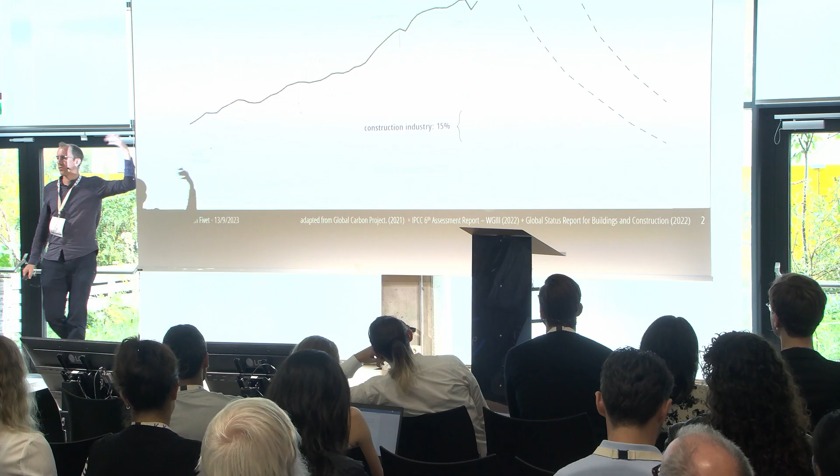So what we see here on this line is the historical evolution of CO2 emissions. At some point, scientists discovered that CO2 is not the only greenhouse gas in the atmosphere and started to measure the other greenhouse gas emissions, and that's the start of the other curve that we see here. This graph combines data from various reports, and the most important one is generated by the IPCC

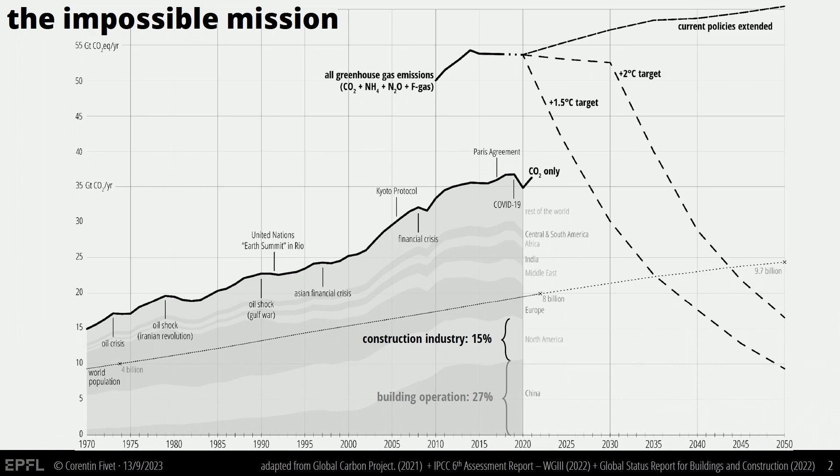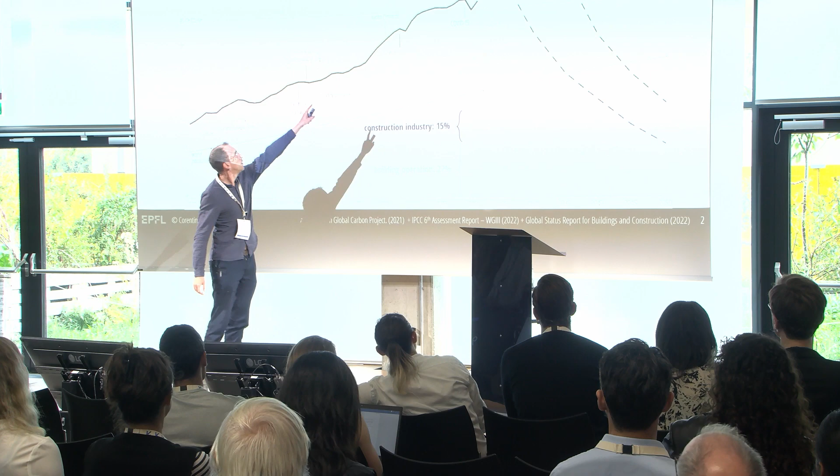1 year ago. What they are showing here is the amount of reduction that is needed to maintain global warming at 1.5 degrees. Those scientists understood that we are not able to reach this goal, so they also show us another curve, which is the maximum 2-degree target.

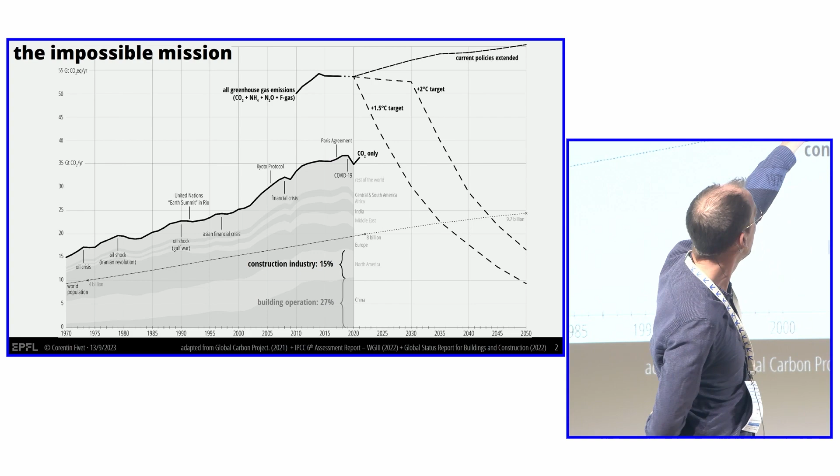Maybe because these scientists know humans too well, or they have a good sense of humor, they also show us the top curve that we see there, which is what will happen if we keep doing business as usual, if we keep doing research as usual as well.

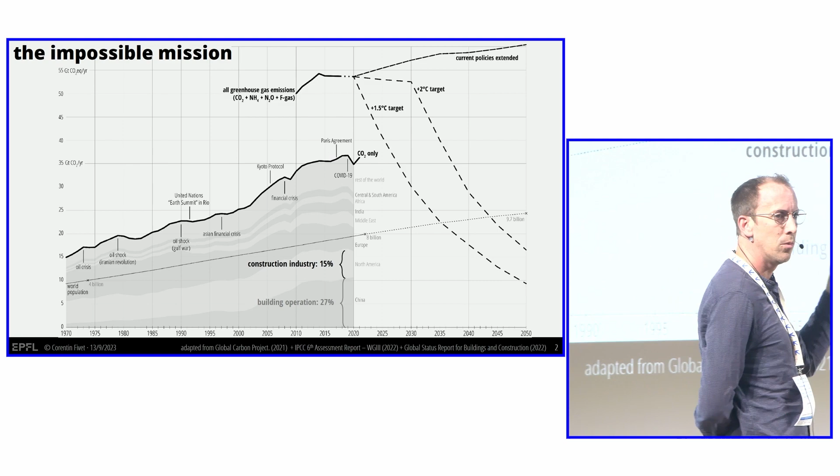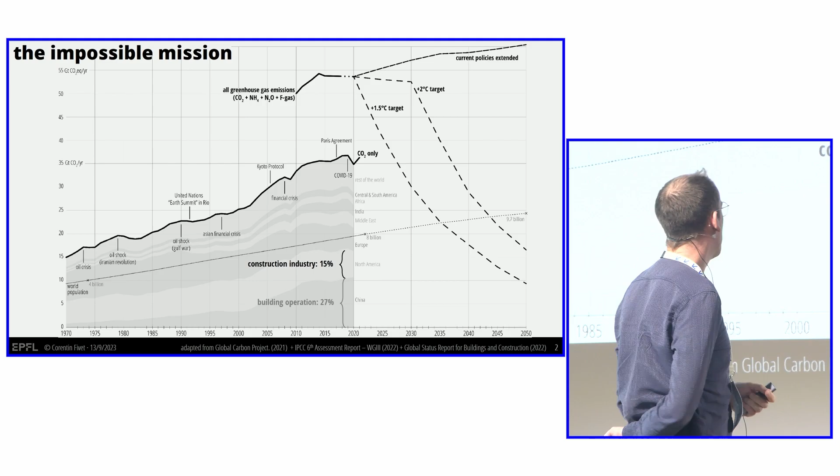This is not a +2, +3, +4 degree target. It's impossible to predict. We only know that all climate tipping points will be reached, and we also know that it's not an environmental crisis anymore. It will be an environmental collapse with all the economic crisis, social crisis, and human crisis that would follow.

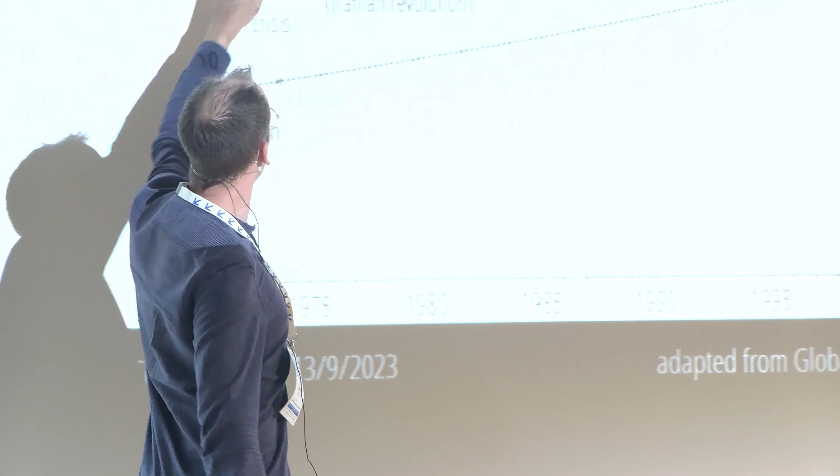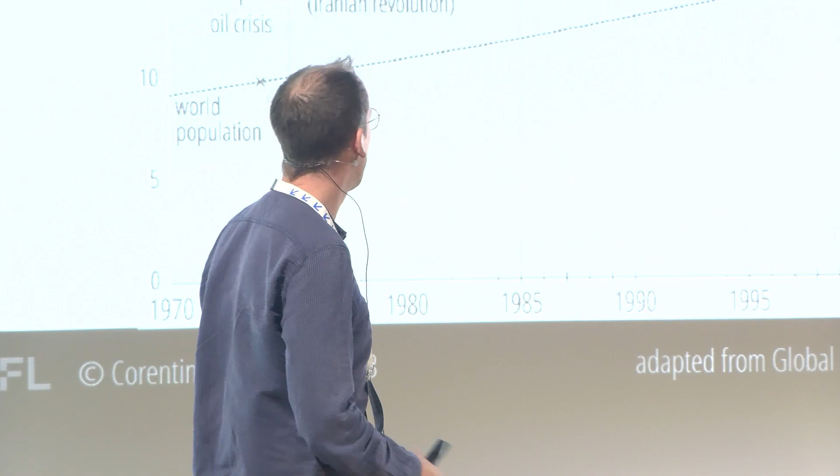On this graph as well, we can see that the only time in history humans have been able to reduce greenhouse gas emissions is during crisis. So we have, for instance, the oil crisis at the beginning of the 70s. We have the financial crisis of 2008, if you remember it, and I'm pretty sure you remember the COVID crisis as well.

So what it means is that if we want to achieve these reductions, we will have to go through a crisis. We are not used to seeing the two parts of these graphs together, but it gives a sense of rate.

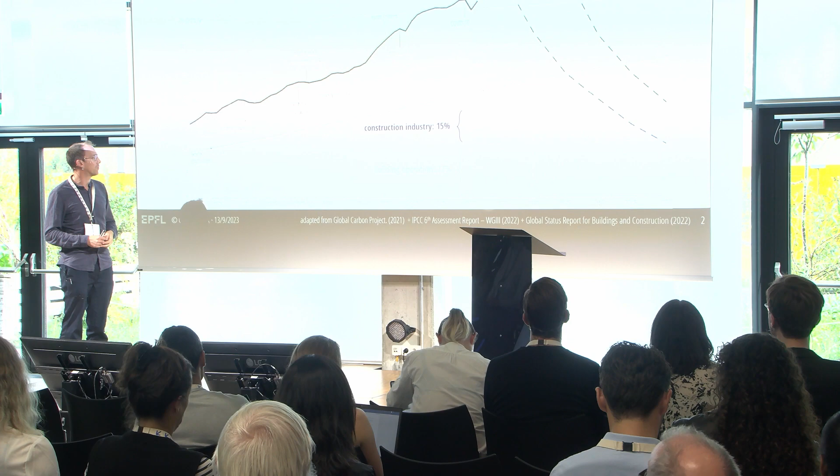And of course, as was presented earlier, the construction industry has a big role here. So what I want to say is that there are two paths. Either we keep doing things as usual, but then it's the environment, nature, that will guide the crisis, and we will have to follow and adapt.

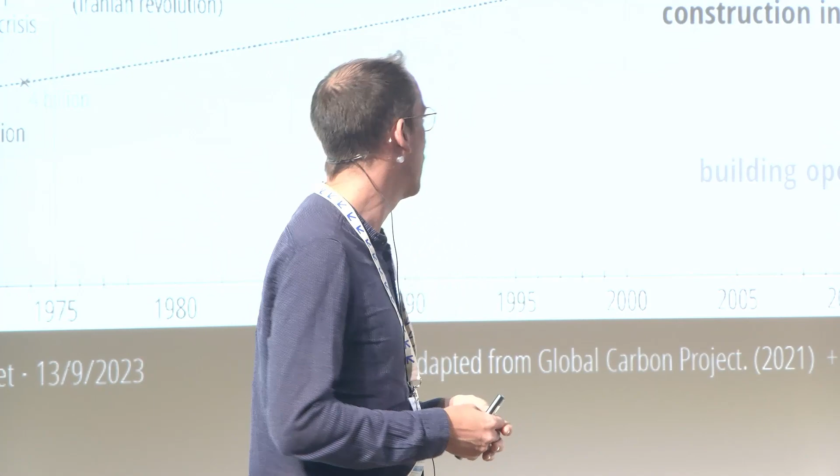Or, the other pathway is that we try to create this crisis ourselves, with the hope that we could control some aspects of it, and probably most importantly, the social aspects of it. In both cases,

it's kind of bad news for this symposium. There is no future for construction. Thank you for the invitation, my talk is over. No, what I mean here is that there is a very high probability that all the things presented in this symposium this year will pretty soon become irrelevant, and sooner than expected.

So how to limit construction, how to limit demolition, it's a very hard question, and I believe my colleague and next speaker, Charlotte Malterre-Barthes, will go into much more detail and nuance on that than me, so I will stop here. As far as I'm concerned, I only have partial answers, and one of them is related to an opportunity that is missed right now, today.

This map shows all the buildings demolished in the past 20 years in Switzerland. There are 70,000 buildings demolished. What I want to highlight is that those buildings are not demolished because the material was degrading, because it was of bad quality. Those buildings were still sound, structurally sound at least, and of good quality. The reason we are demolishing them is real estate investment, because some people decide there is a need for new buildings.

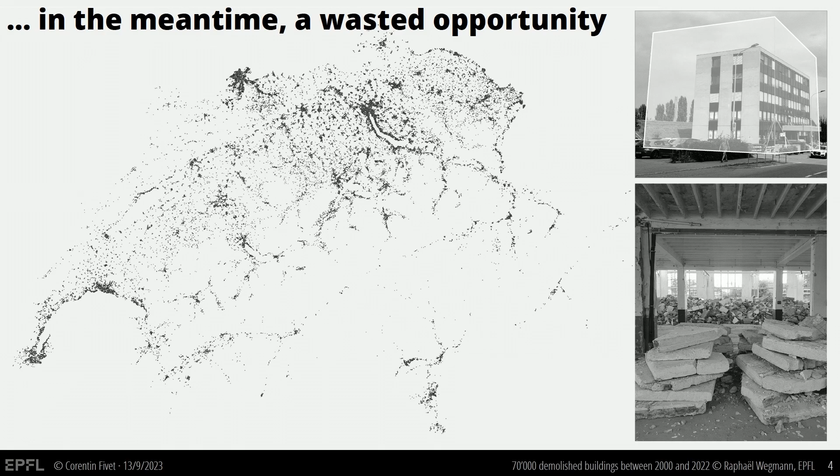But this material here, there is a lost opportunity if we are not reusing it. So what I mean is the reuse of components. I'm used to giving this example because it shows all aspects in a very clear way. This is the little story of a bridge built over the Rhine, the border between Switzerland and Germany.

Built in 1810, 100 years later the city decided to replace that bridge with a bigger, taller one. A few months later, while it was being dismantled, monks from the village nearby decided to reuse the pieces. So the posts in the bridge here are actually these ones. We can actually see here the cuts that were there before. They used them to build this barn.

This barn is still in use today. The picture dates from 2019, but it's still there. So what we have here is a building that is 100 years old, made with components that are 200 years old.

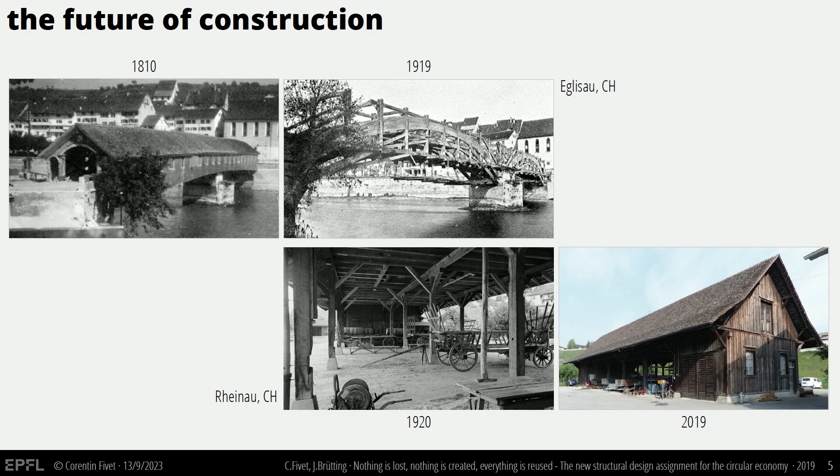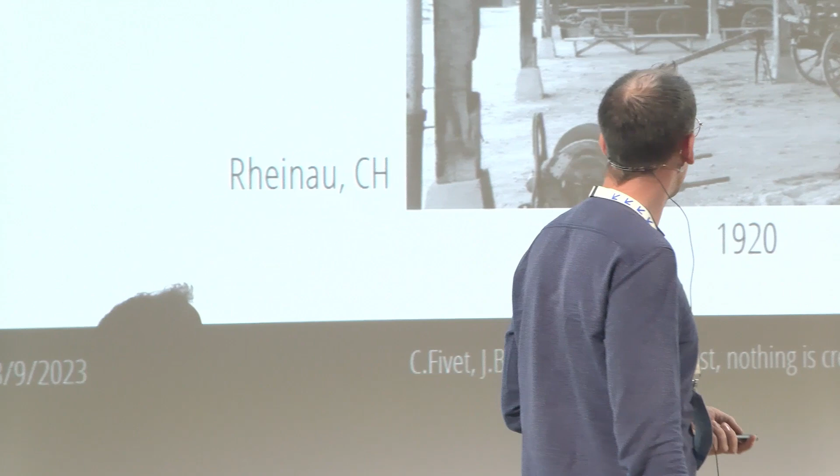And that's probably the future of construction - one aspect we should emphasize. As was mentioned earlier, most of the answers for the future are already there in the past, and probably we don't have the time to create and test new technologies.

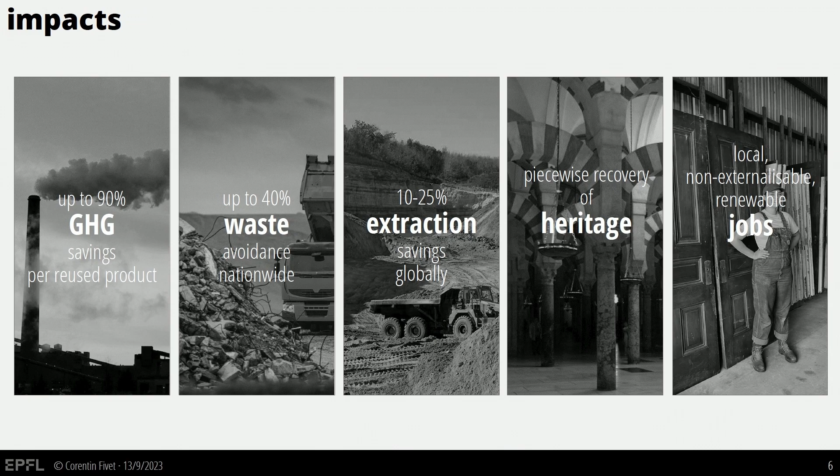So in terms of impact, what would component reuse bring if it's well done? Not all types of reuse, but for certain types that I will show at the end of my presentation, per product we could reduce up to 90% of greenhouse gas emissions. That's huge. If we reuse all waste in Switzerland, we can reduce up to 40% of waste. We could save 10 to 25% of extracted materials - only that, but still it's not nothing.

So reuse is only one solution, not the solution. Reuse contributes to the piecewise recovery of heritage, a cultural component that's quite important as well. And because of all the care needed throughout these circular processes, reuse is also a driver for jobs that are local, non-externalisable, and renewable.

So reuse is there - it's been in use for centuries. We're not doing it probably because designers have a fear of the unknown, that we're not used to it anymore. So the goal of this team, and what I will present later, is indeed to try to avoid or clear some fears of the unknown.

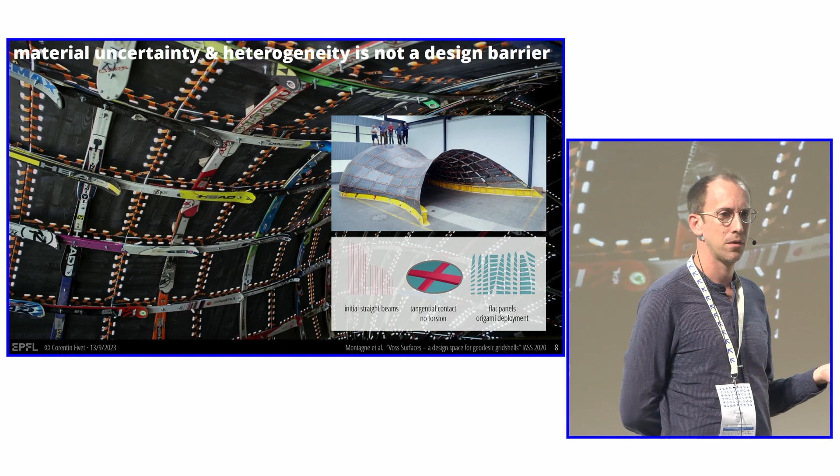We started a bit naively because we are designers, and the first question for us was to check and understand that it's okay if we don't know everything about the materials. As engineers or architects, we don't need to know everything about a given material - how it's behaving, all the mechanical properties - in order to build a structure that is structurally sound and safe for people.

Because we were in Switzerland, we had access to thousands of skis that were thrown away, and we showed that these skis could be assembled as an elastic grid shell, combined with reclaimed flat panels as well. There's a lot of maths behind this assembly, but this is not the main focus of this talk today.

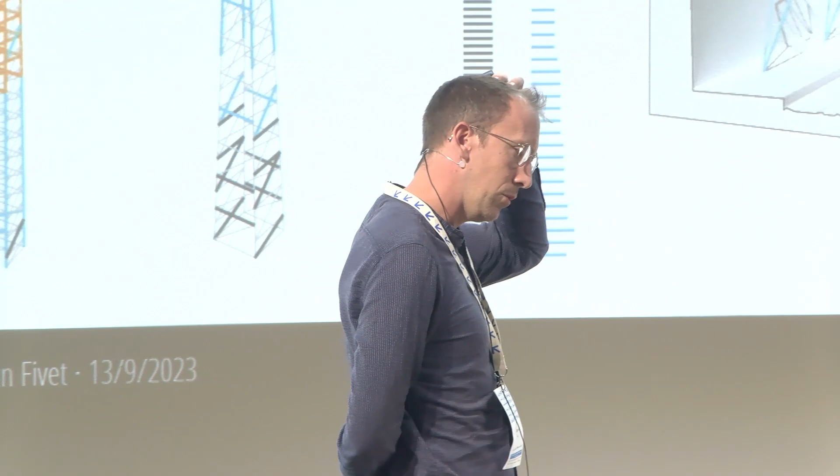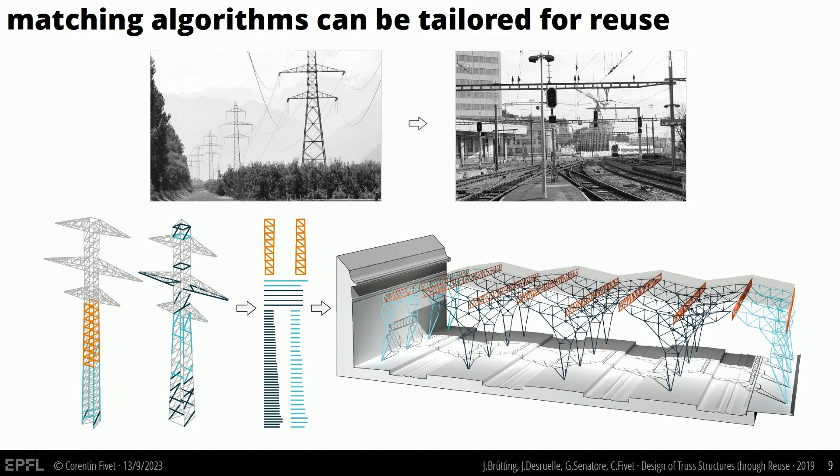Then we moved on, looking at structures made of steel and timber. With this first case study, we showed that in the end it's an algorithm, a mathematical problem that could be optimized - if we want to reclaim members from these old electric pylons that are actually being dismantled in valleys at the moment, and create an extension for the Lausanne train station roof.

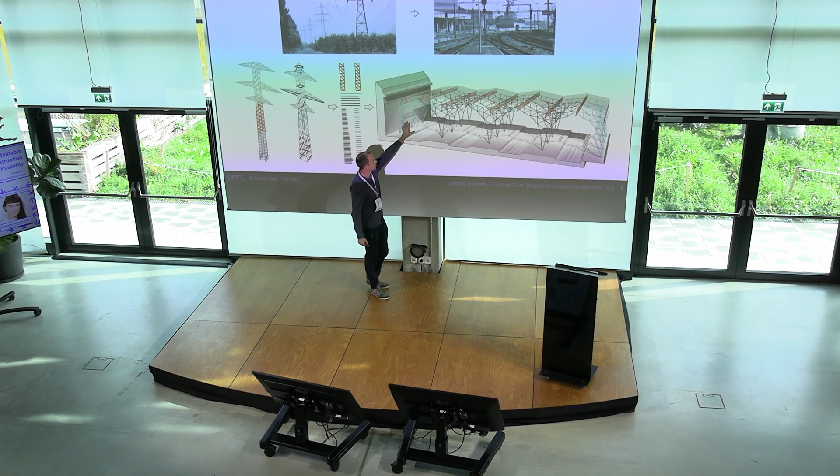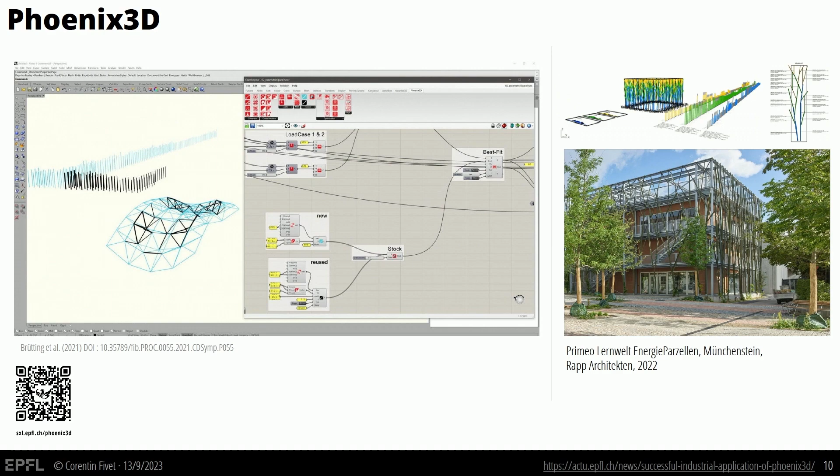There are three questions we need to solve as designers simultaneously: what components are worth taking from the sources, where to put them in the structure, and what shape to give to the structure - a form-finding issue that can be tackled with tools. If you're interested, we have a Grasshopper tool that's freely available, used by this architect for reusing electric pylons in this facade.

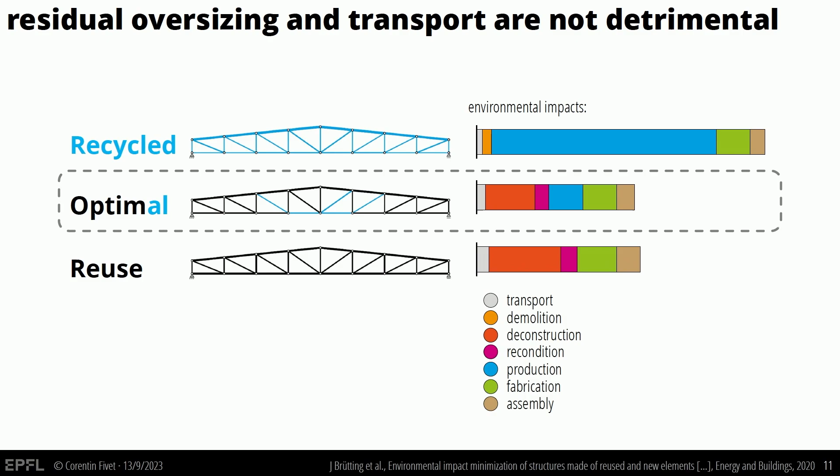We also showed that transport impact is not an issue. The savings related to reusing those components are so huge that it's okay to transport them up to 500 kilometers, sometimes 1,000 kilometers.

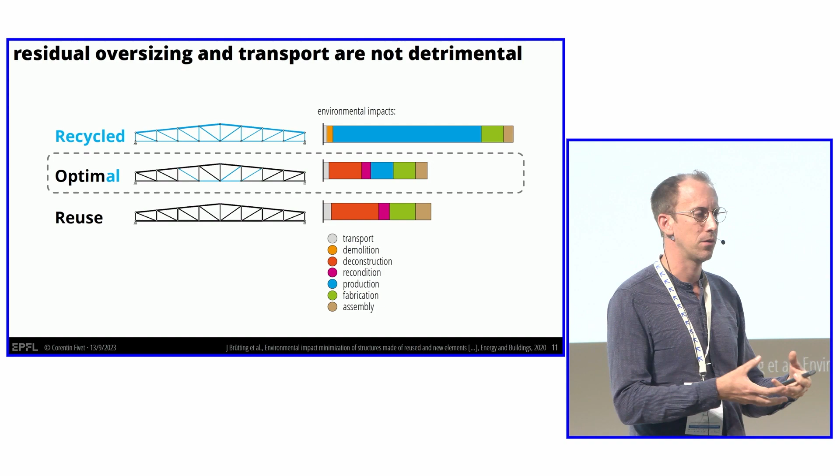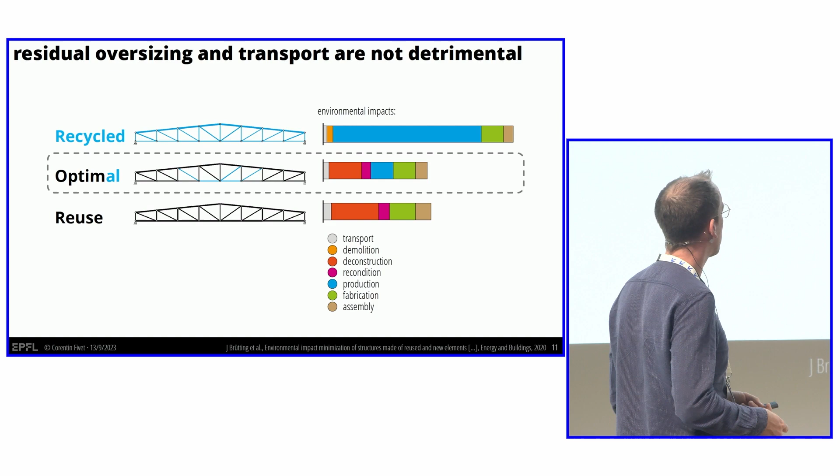We also show that because when we're reusing components, you cannot optimize the cross-sections - so every piece is a bit oversized. But this is not a real issue, and by replacing those components that are too oversized with newly manufactured ones, you can reduce the environmental impacts further.

And all that we did with steel, timber, and skis was a bit irrelevant given the fact that the construction industry today is mainly related to concrete. Cement is responsible for 8% of global CO2 emissions, all things considered, and 30% of construction and demolition waste.

Here I want to make a clear distinction between recycled concrete and reused concrete. When we speak of recycled concrete, it means we're reusing old aggregates, combined with new ones. We also have to add as much cement as in new concrete, which means recycled concrete will generate as much CO2 emissions as newly conventional concrete.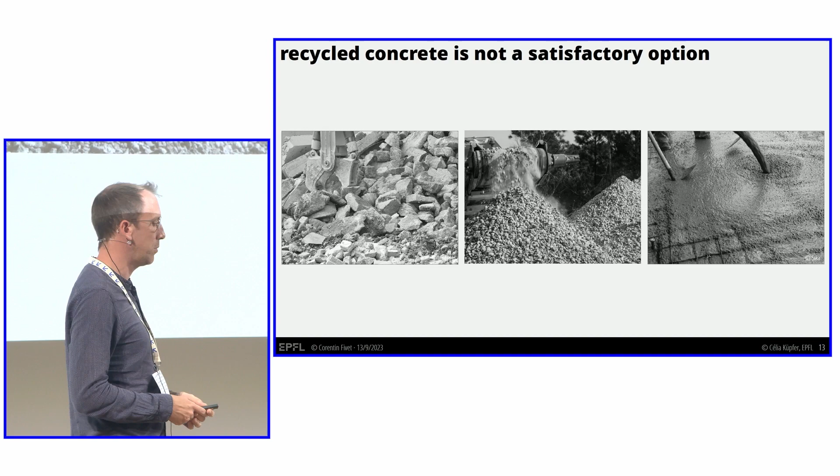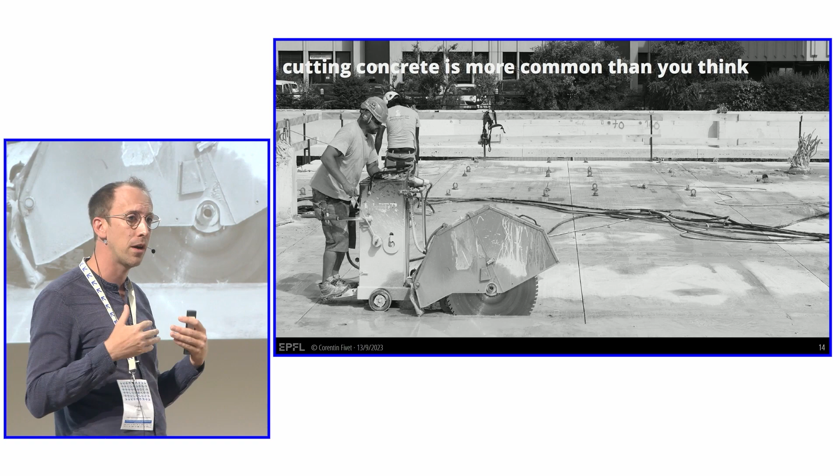At the same time, there are existing techniques to take care of the pieces before recycling them. So before crushing the concrete, we could cut the pieces and reassemble them - extending the service life of those components before the recycling process.

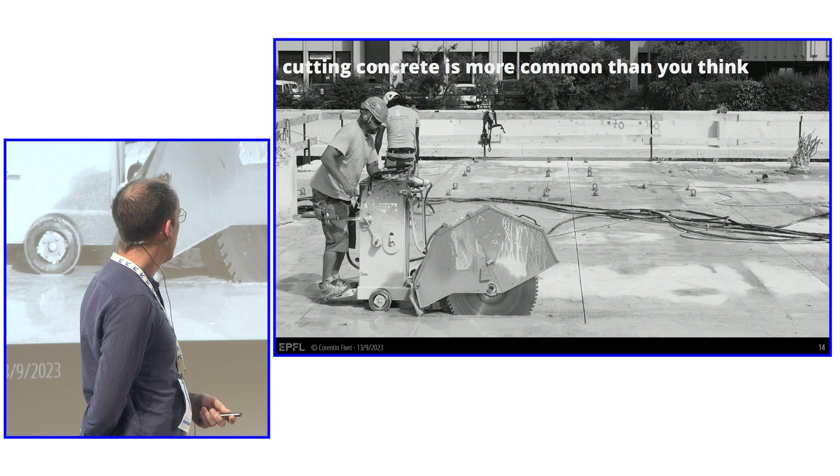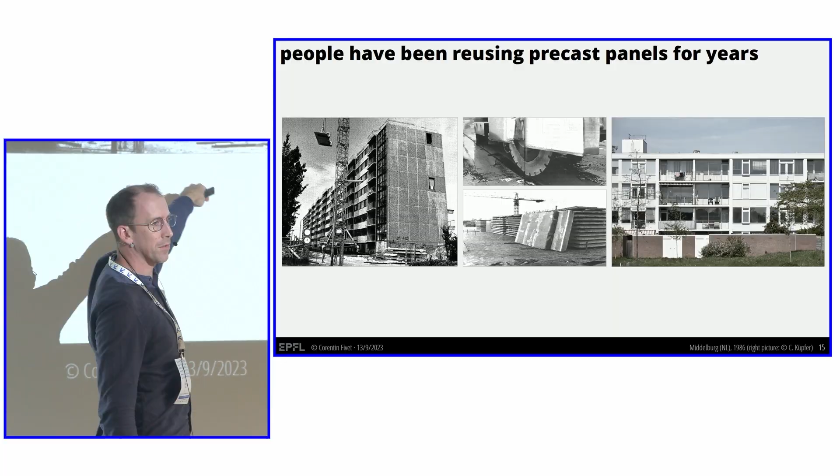This isn't new - here's an example from 1986 in the Netherlands, where a building made of precast reinforced concrete panels was dismantled, sometimes cut, and reassembled. This is one of the many buildings that was built using those panels as structural components. You don't see it from the outside - it's just there.

What I mean here is that it's also economically viable as a strategy. As far as we were concerned, we were in Switzerland. There's not that much precast concrete in Switzerland, there is a lot of cast-in-place concrete.

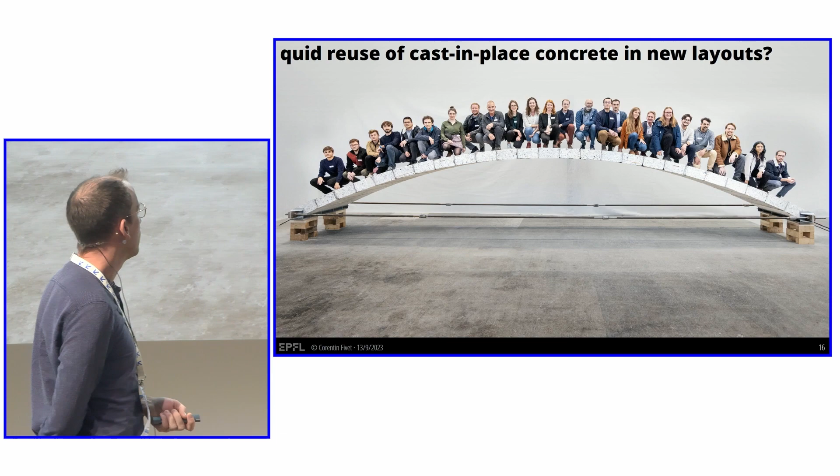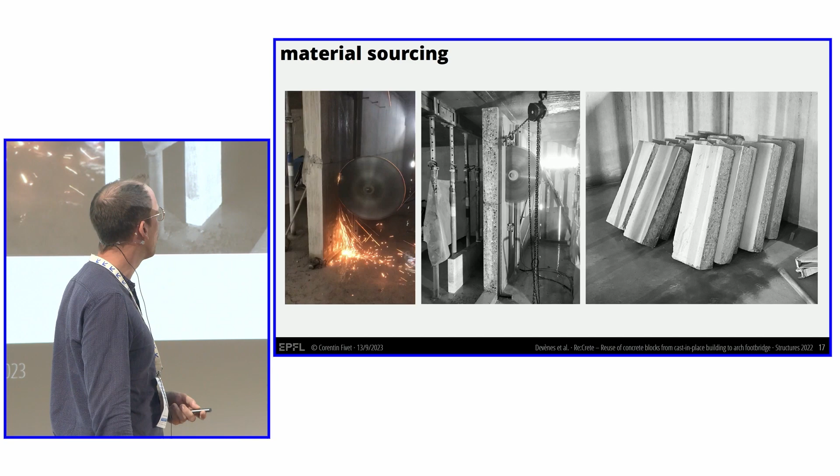So first we were interested in showing that it would also make sense to cut reinforced concrete and reuse the pieces into new assemblies. So we started with this footbridge here. The pieces were actually dismantled from the basement of a hotel that was built only 10 years ago. So it wasn't a full transformation, it's just a local transformation. It made sense for those cutting companies to have small pieces because they had to move them up to the ground floor. And so we drilled those pieces and assembled them there.

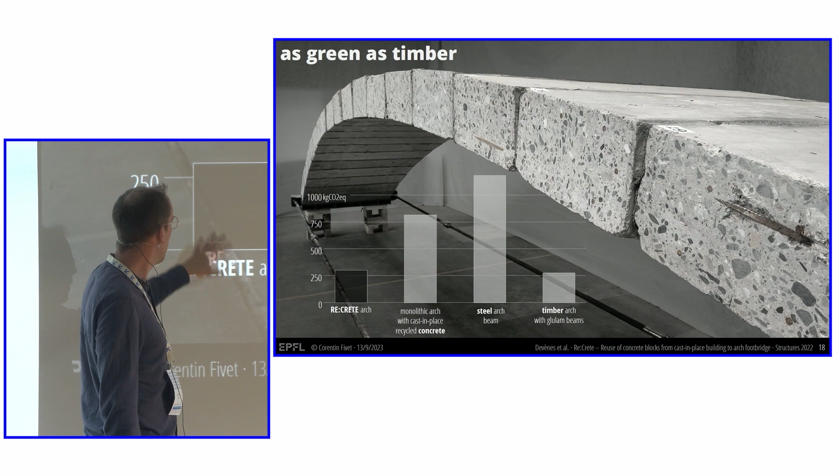Of course, what matters is the life cycle assessment at the end of the process. What we see here is this footbridge that we built, compared to the equivalent bridge but with newly cast-in-place recycled concrete here as a monolithic arch, and the equivalent in steel and the equivalent in timber.

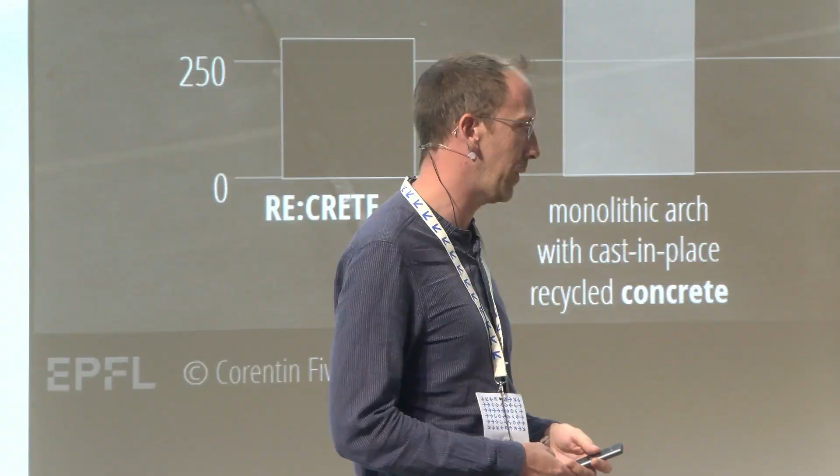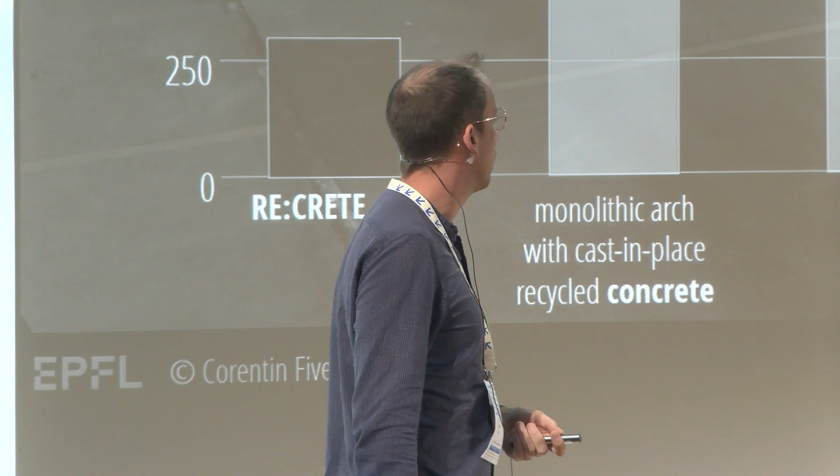So the reused concrete solution decreases compared to the other conventional solutions by a factor of 2 to 3, but also is very close to the timber solutions. Probably that reused concrete is as green as timber. Timber is usually seen as the most sustainable construction material for structures, and here there is a new alternative to timber. We should increase the construction in timber, but we could also complement it with recrete, because this arch here has the same quality, the same behavior, the same properties as a new arch in reinforced concrete with new reinforced concrete. In terms of properties, it's just about the same.

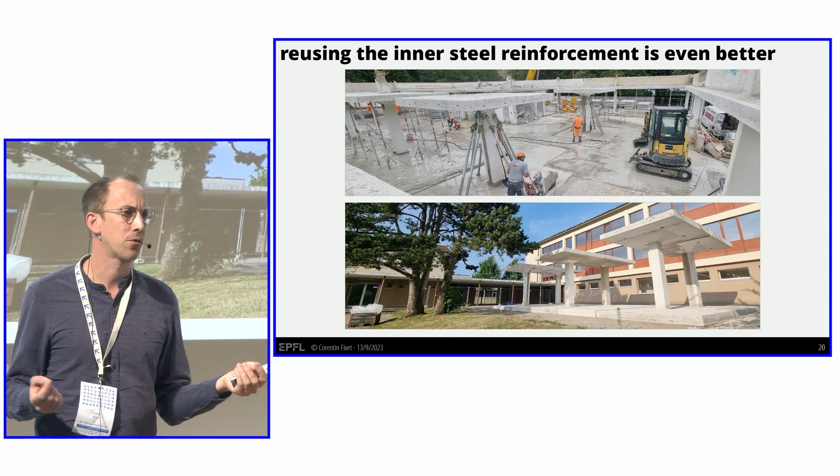And that will become even more evident with the next examples I will show. This bridge is currently being tested on site in Valais. And of course, in this bridge we're only using the compression strength of the concrete, but we know that in reinforced concrete there is also steel reinforcement, bringing bending capacity, and that should be reused as well.

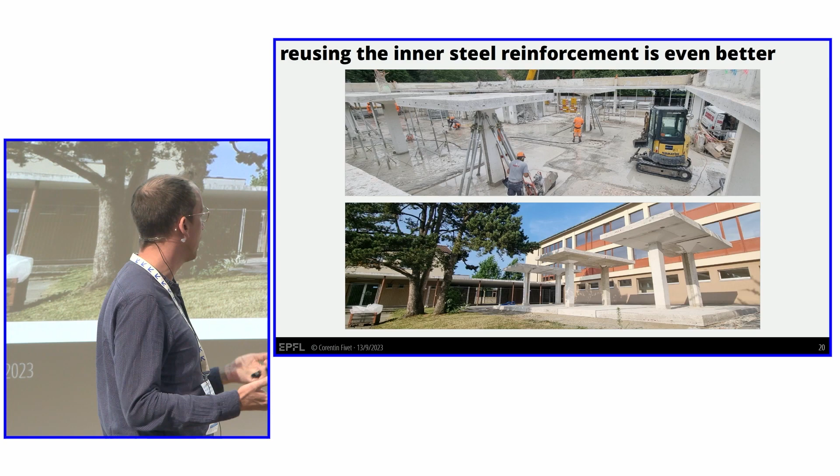So we started here with students who actually led the project. They managed to collaborate with industries, get the funding and so on, in order to cut those mushroom slabs and reassemble them together to build a new pavilion that will be completed with straw bale walls, and now there is a roof structure already on top of that. This is available, it's feasible, it's economically viable as well.

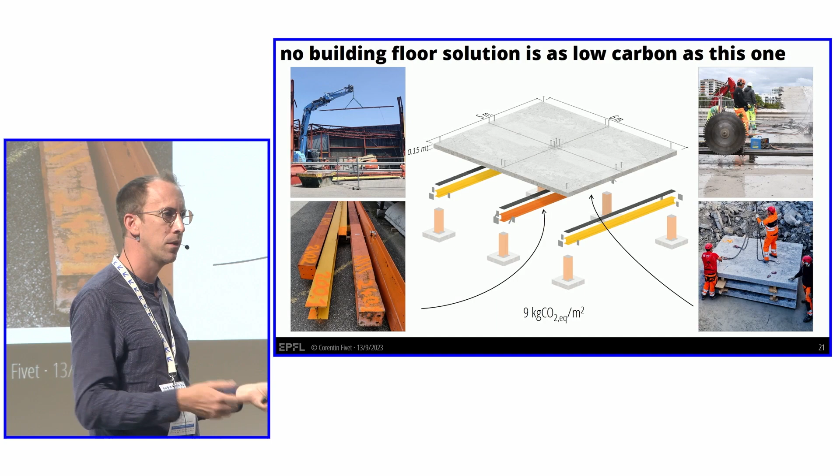And if you remember when I spoke about the 90% CO2 emissions, this is achievable with this solution in particular, where slabs are just being cut as slabs, reused, and applied in a new context with current norms, so answering all the norms and the constraints of today's construction.

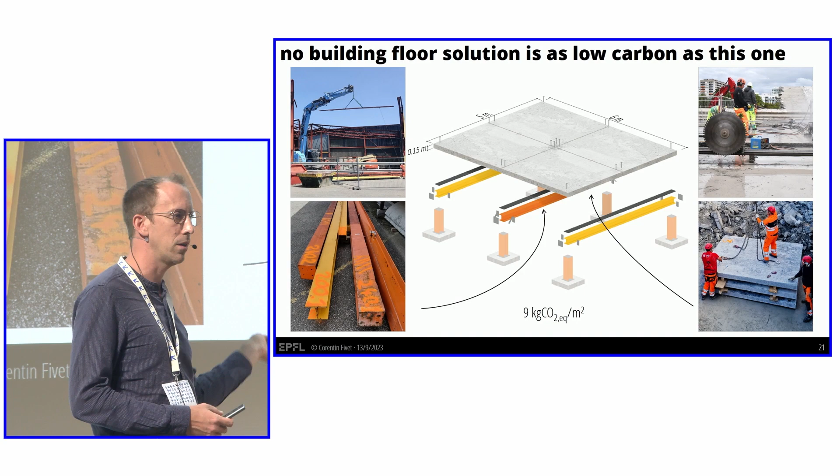To achieve the same load, sometimes we have to be a bit clever by reducing the spans, for instance. But if we are reusing steel beams as well to reach the spans that we need, then we could build everything we want. And this reused solution for a slab is only 9 kilo CO2 equivalent per square meter. There is no other solution on the market or in research that can reach that low carbon footprint. And it's readily available. There is nothing new. The technique is there, the technology is there.

And still, as researchers, we can also have fun. I mean, it's a boring slab to reuse as a slab, there is no change of form. And this is where we have the fun as the designers. But we can find the fun elsewhere, because now the design process also becomes a deconstruction, a careful deconstruction process.

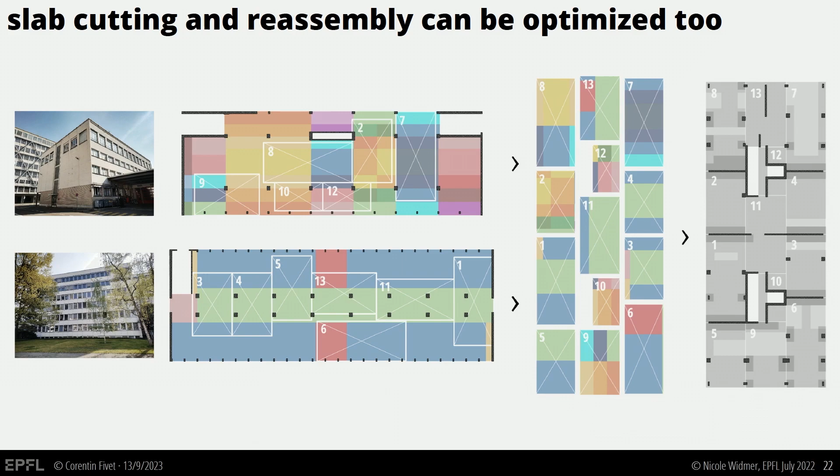So if we start - this is a case study done by another student - from given buildings with their floor plans, there is a variation in the steel reinforcement throughout the slabs that we can characterize. Now the question is, what are the cuts that are needed? How to reassemble the pieces of the puzzle in order to meet the structural demands in a new given floor plan. And this again is a process that can be optimized and seen as a design question.

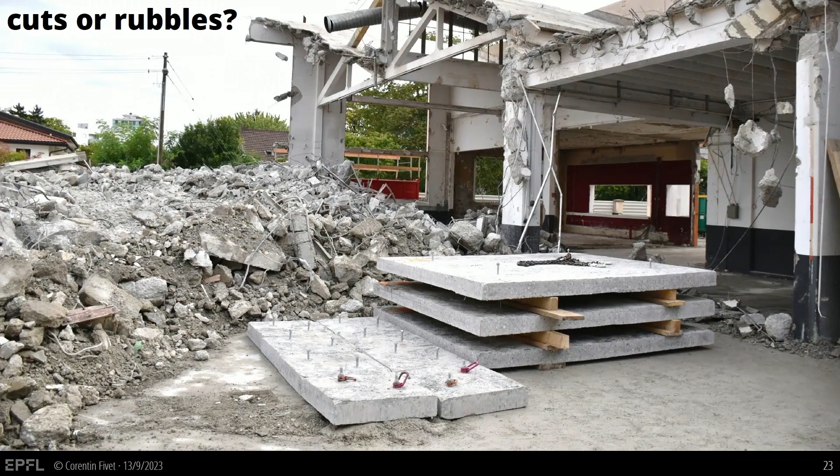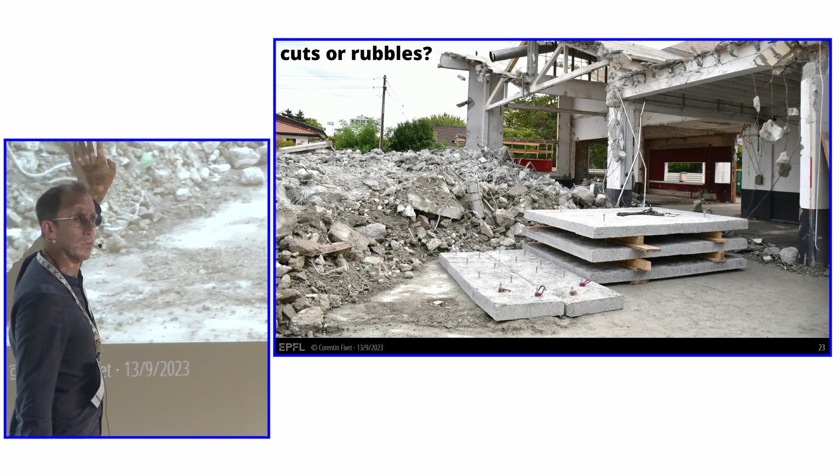And then to conclude, this is a typical type of waste that we have. These are the slabs that we've been cutting to assemble as slabs pretty soon. But you see, this waste is also there, and then the question is what to do with these rubbles. There are solutions that have already been developed in other universities as well to tackle them, and probably more solutions are needed.

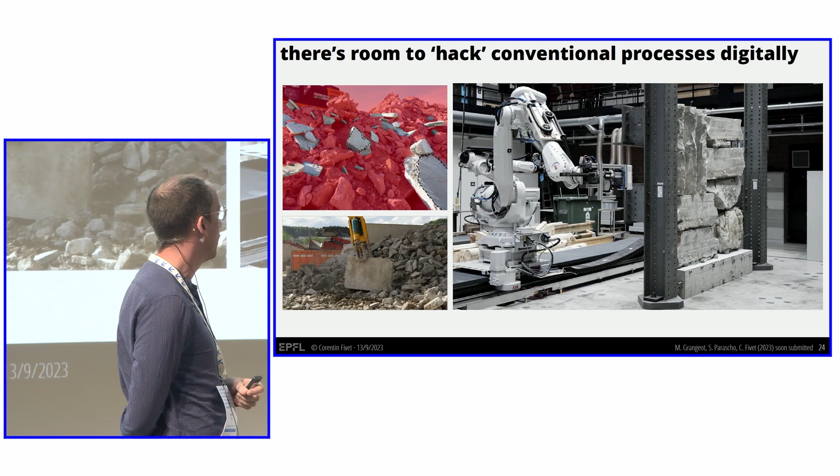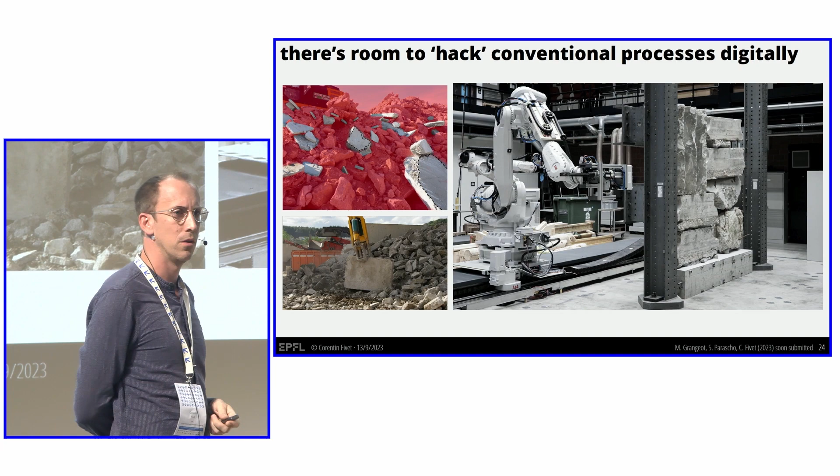As far as we are concerned, we are also starting to look at what is available by hacking current conventional industrial tools that we have. So I'm not against digital technology, but probably we should be very careful about what the digitalization is allowing for the construction industry and its environmental impact as a whole. I think that Stefana Parascho will present later on, and will also present a bit more about it.